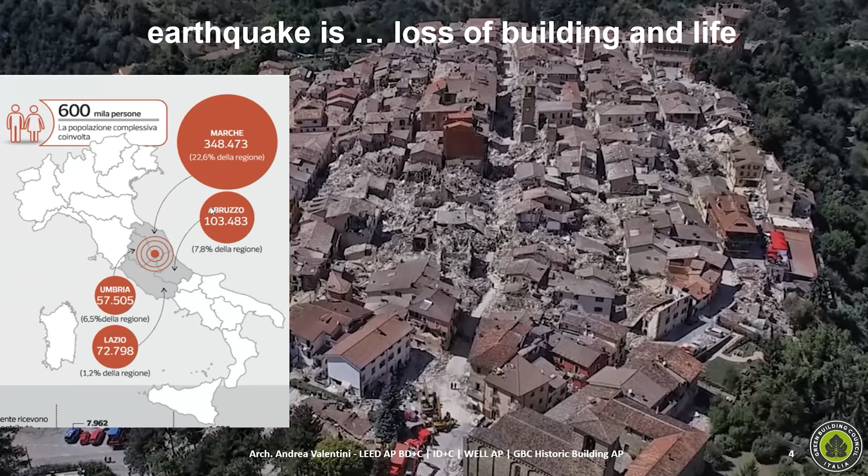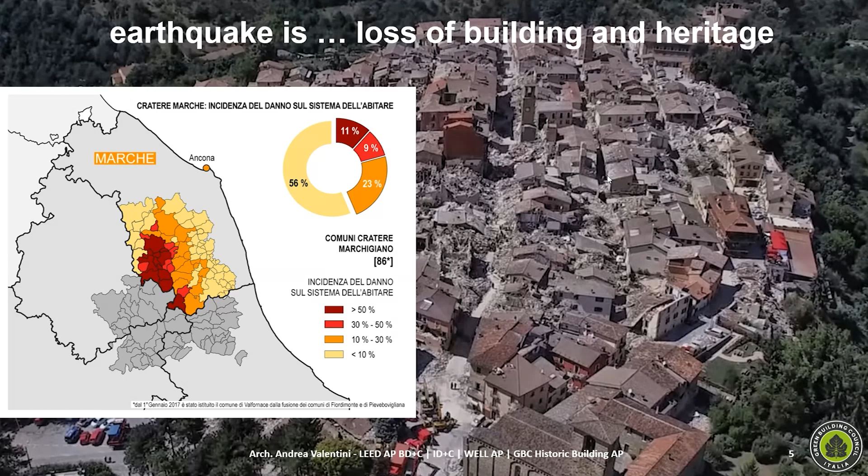We can see, especially in this part of Italy, there are a lot of historic buildings, historic centers, little historic districts, and so this kind of event causes a lot of damage to all the heritage. The last earthquake, in 2016, affected a lot of people, with some victims, especially in the ancient buildings. You can see a lot of small counties touched by this kind of event, especially the heritage and historic buildings.

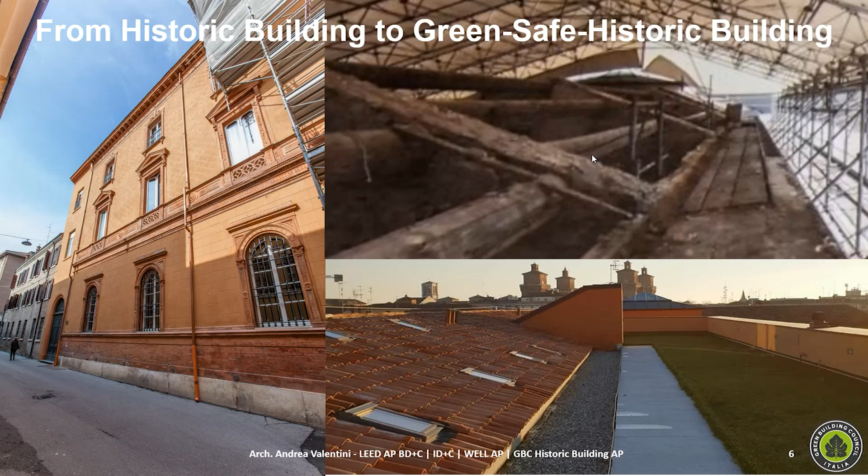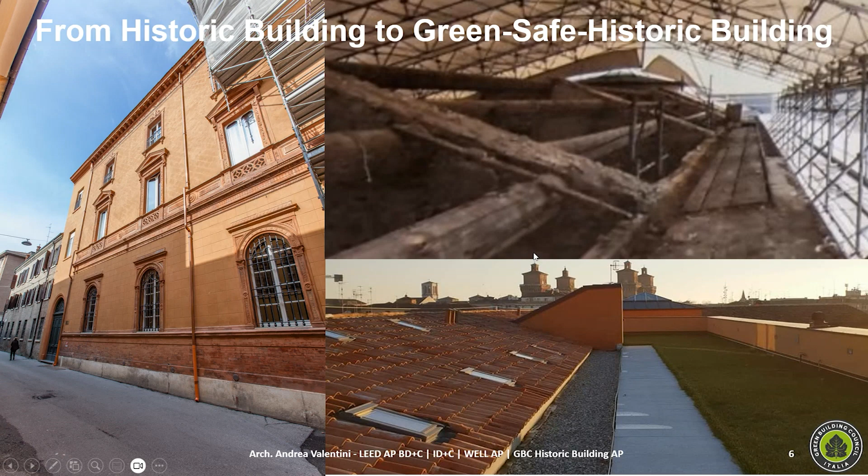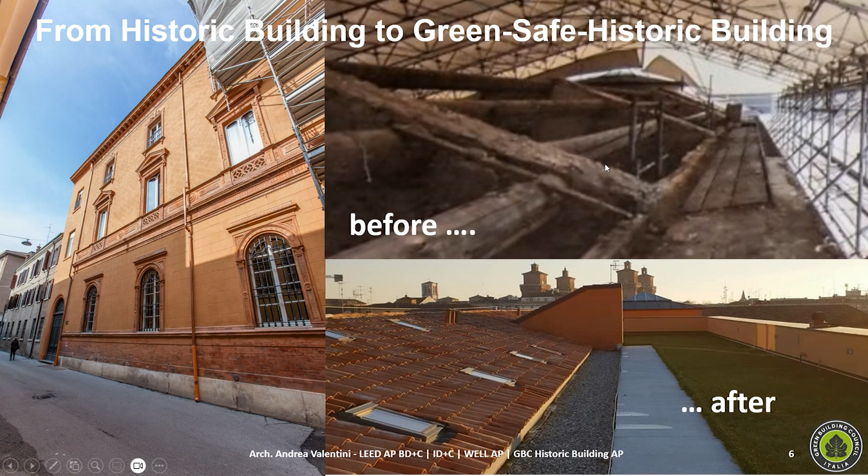This introduction is the attempt to merge historic building and safety, from historic building to green and safe historic building. Especially in historic buildings, we have to have also the safety of the building and the restoration. It must be focused not only on sustainability but also on safety. Safety is a category of sustainability. You can see this kind of image that really merges these issues, before and after this kind of intervention in an ancient building.

And so we now focus on the issue of heritage and sustainability. Restoration is a very important category. It's a category of sustainability. The restoration intervention is really a very old practice of sustainability, and we have to learn from this knowledge because we have to practice and know deeply this tradition. We have also published in English a lot of examples of historic building transformation and restoration, and you can find this publication.

We have done this rating system. This rating system is derived from LEED, but with the focus on restoration of ancient buildings. This is a tool for how to design and how to construct in a historic building, because it's a very particular construction technique. And so you now see the categories of LEED, categories of sustainability, as you know, like water, energy, material resources, indoor quality, innovation. But there is another category. This is the new category of the GBC Historic Building rating system.

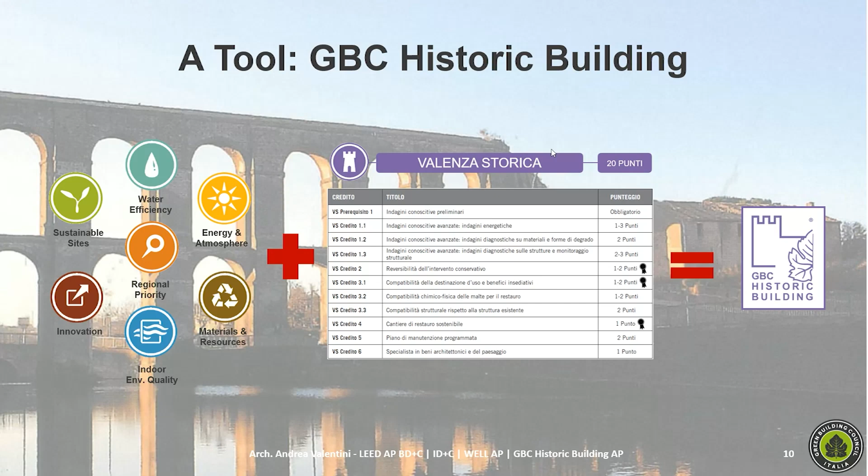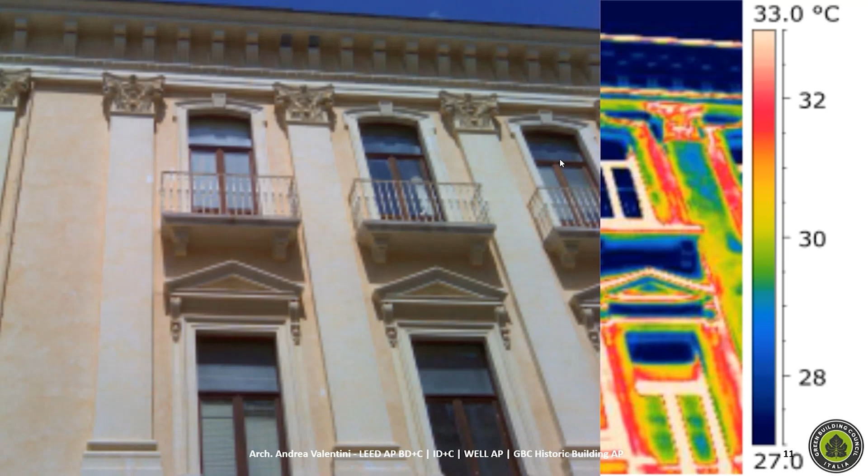It is historic value. In historic value, a lot of credits are focused on the techniques of analysis of the historic building, because you have to know very, very deeply all the history, the design, the materials of these ancient buildings. And so you can begin from an energy audit, so you can deeply know the building in its energetic issues. But especially you have to know all kinds of materials, because you have analyzed all the materials that over many years, in centuries, maybe have changed. And so you really have a thermography of the history through the mortars or the materials used in that building during the construction and the reconstruction over many years.

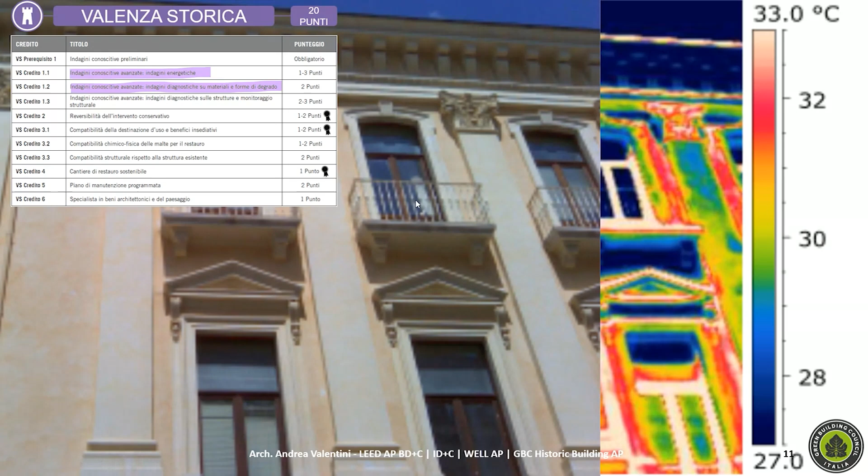And so you have also used this kind of energy audit to know the degradation of the building, not only the insulation and thermal properties, but also the kind of materials inside, like mortars, like bricks, and many other historic materials.

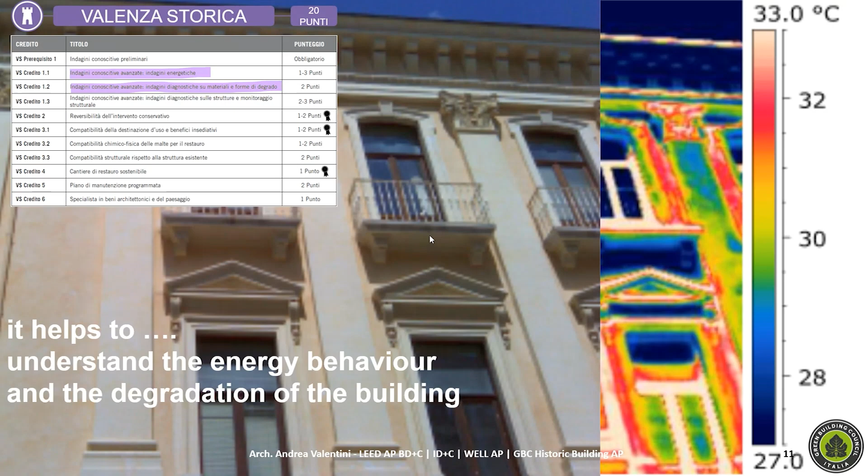Another important thing to know is the seismic resistance of the envelope and all the structure of the building. There are a lot of techniques to know the resistance of the walls, of the pillars, in all the materials, also in the wood structure. This kind of analytical knowledge of all the materials is very important, very fundamental to do the restoration design proper for this kind of buildings.

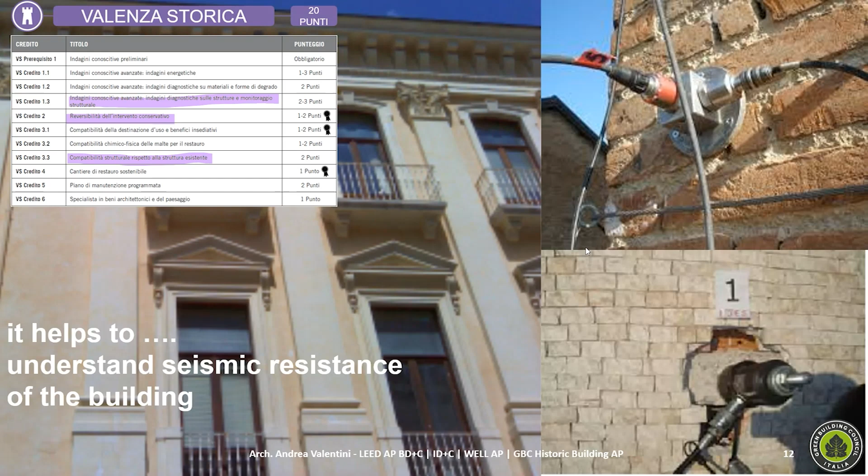You have to know the seismic resistance of the building, because you can do all the plans as you like, the energy efficiency, but at first you have to know the resistance, the seismic resistance of the building, because from here it derives all kinds of intervention to follow.

You have to know all the kinds of materials, the wood, and other kinds of pavements, and so you have to know the identity card of these kinds of buildings, the materials and the resistance of these materials. For example, this category of the rating system called historic value is very important. This is like a comparison between the historic building and the LEED building design construction.

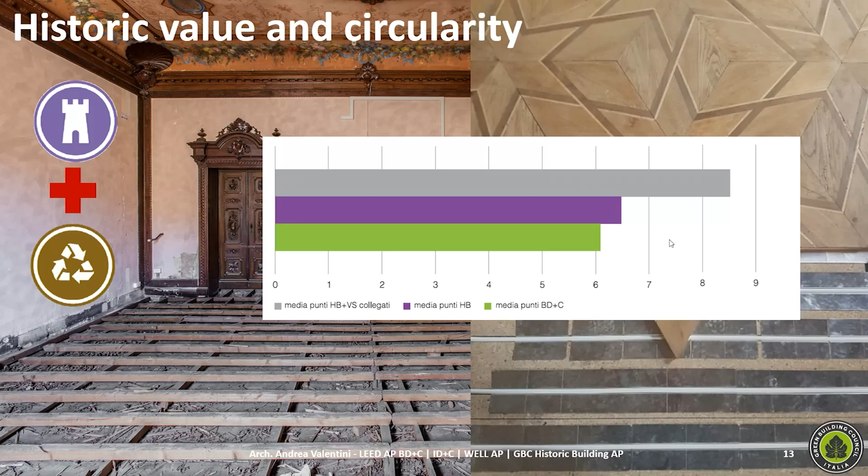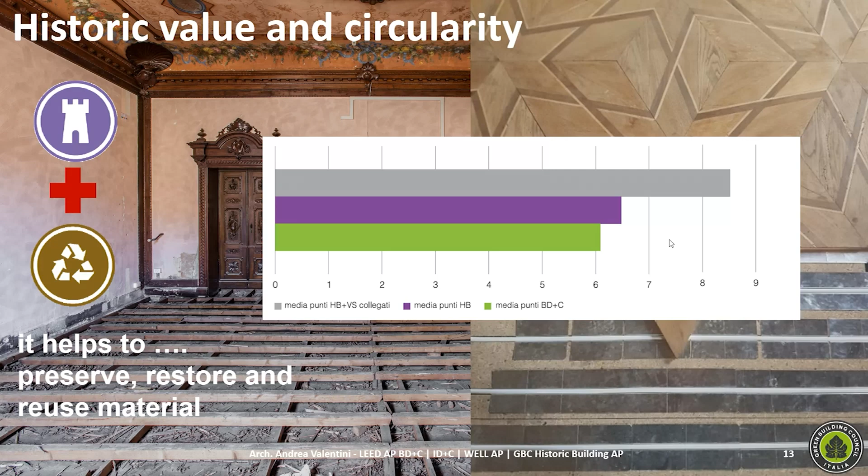It's very similar, but historic value is an important category of this kind of rating system. This knowledge helps to preserve, to restore, and especially reuse materials. If you don't know the properties of the materials, you cannot reuse them. If you don't know the kind of resistance, the kind of durability of these materials - because durability is another very important category of sustainability.

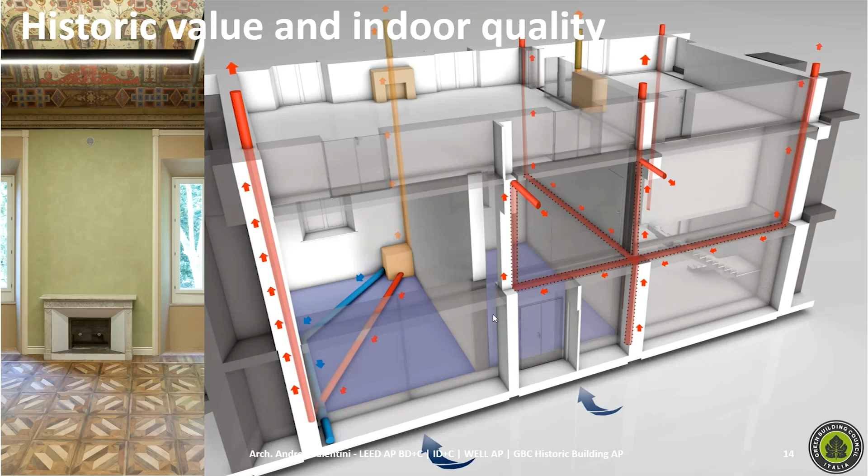We can also have knowledge of the ancient plants - all the kinds of distribution of ancient plants - because you can reuse the kind of cavity to pass new plants. Another important thing: this kind of knowledge helps to understand and use historic bioclimatic solutions.

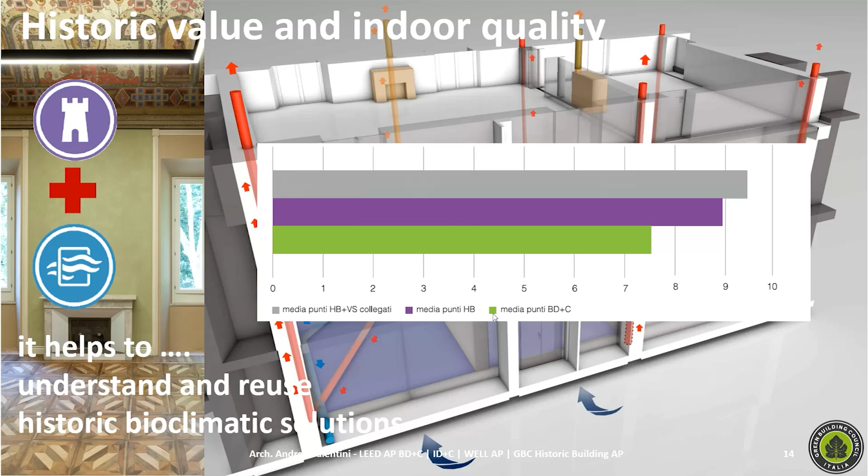This new category of historic value is very important. If you are interested, you can see in the English manual of this historic building all the kinds of knowledge and design categories that you have to apply in historic building intervention, design and construction.

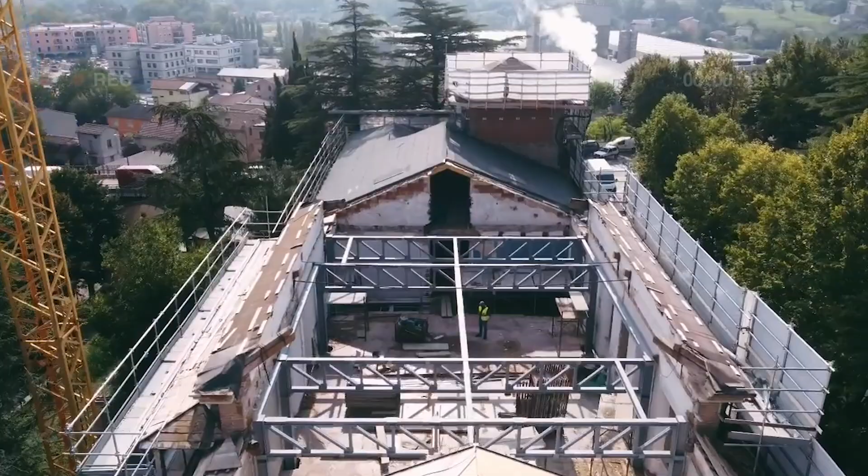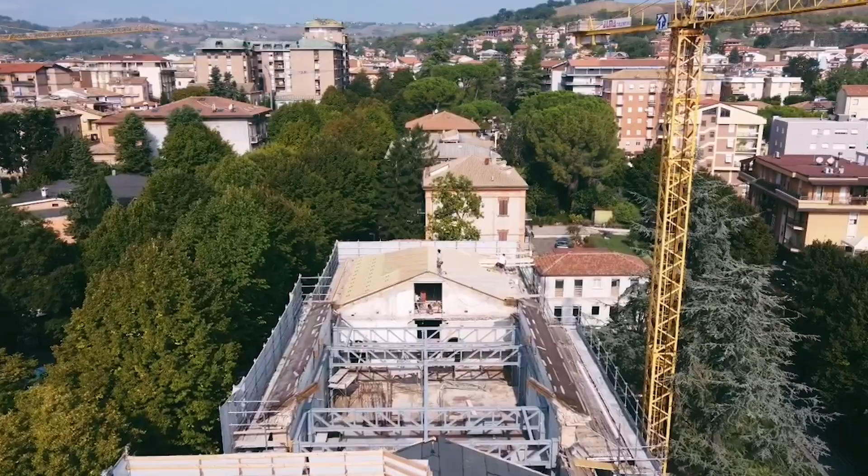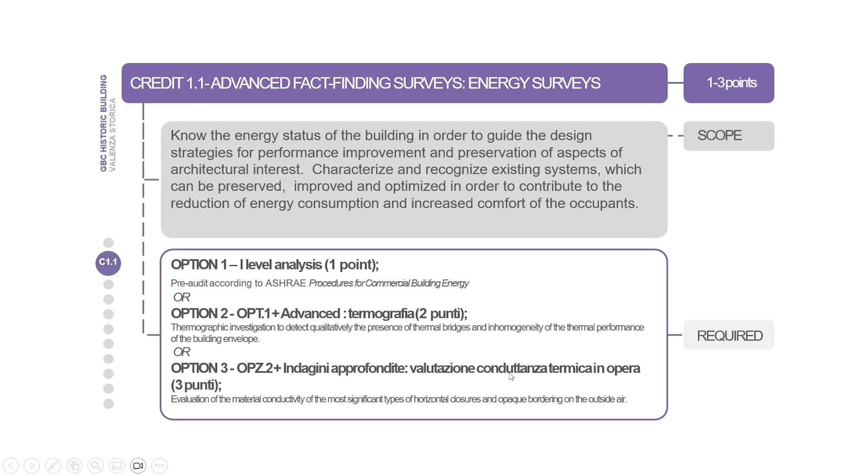As we have seen, we have to have energy surveys, analysis, and very important evaluation of material conductivity, the most significant types of horizontal closures and bordering on the outside air.

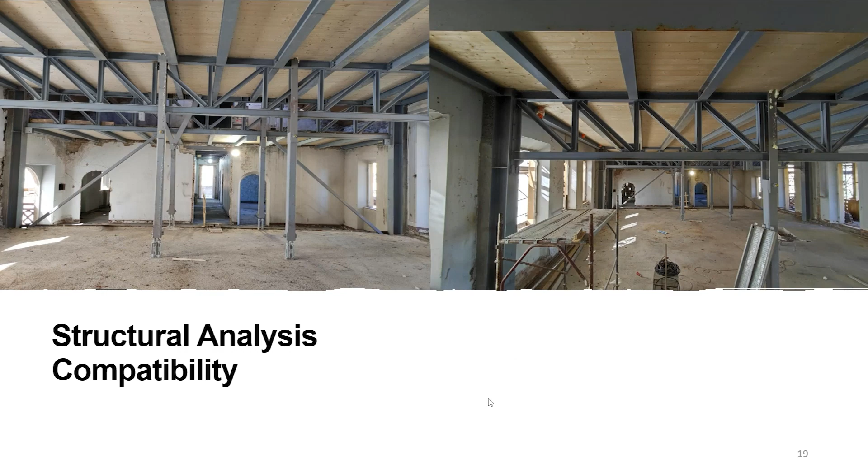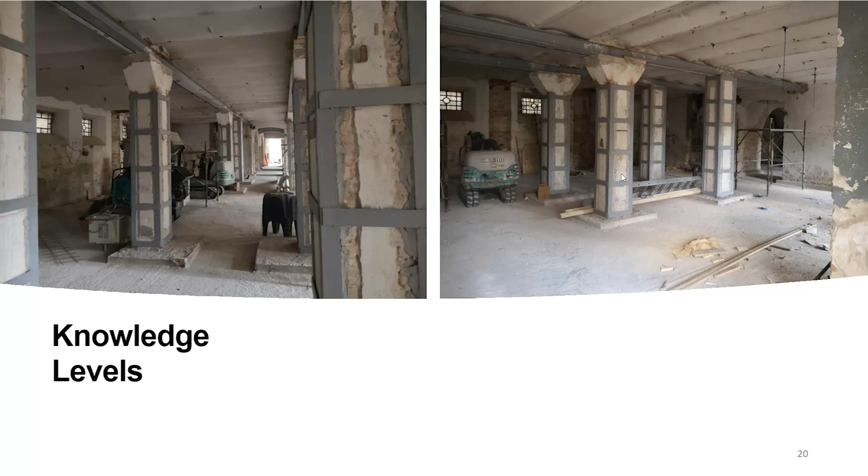Another very important thing: you have to analyze the structural compatibility with the existing building. In this example, you saw a ceiling hung with steel and iron structure, because you have to preserve the historic value of the image of this kind of building. This is an example with old pillars in bricks, very enclosed by steel structure.

You also have to value the reversibility criteria - whether your kind of intervention or restoration can reverse the intervention or restoration design. This is an example.

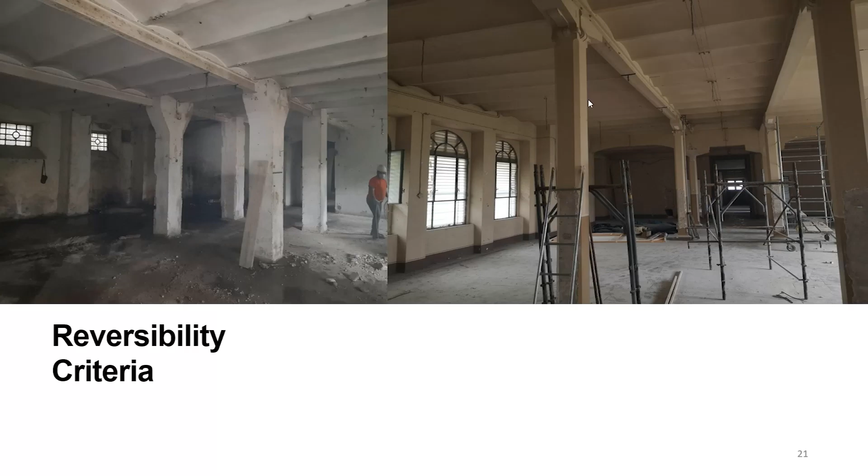This is the ceiling that we have seen before, with these very little pillars, but they are very historic - the memory of this building. There was a factory in the first years of the '90s, and so this kind of structure was maintained because of the image, and we chose to hang the ceiling, for example. The reversibility of the restoration design is very important.

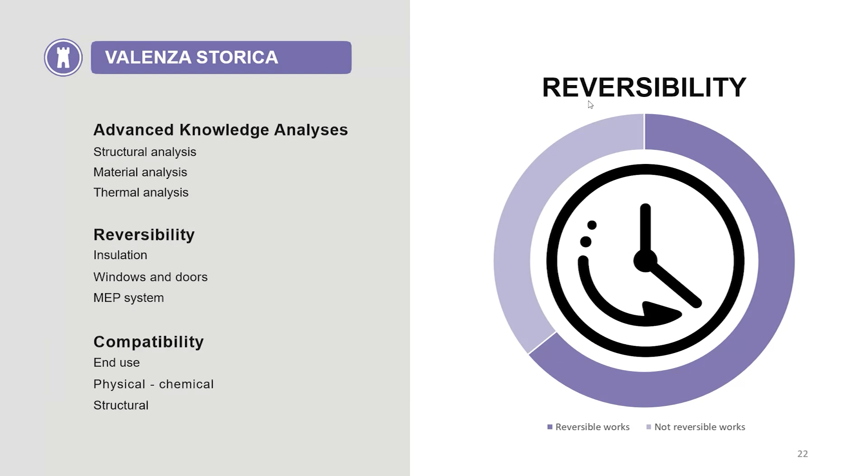So we have to have advanced knowledge analysis, the reversibility and the compatibility of the end use, the physical, chemical materials, and the structural materials. You also have to have the compatibility of the end use of this kind.

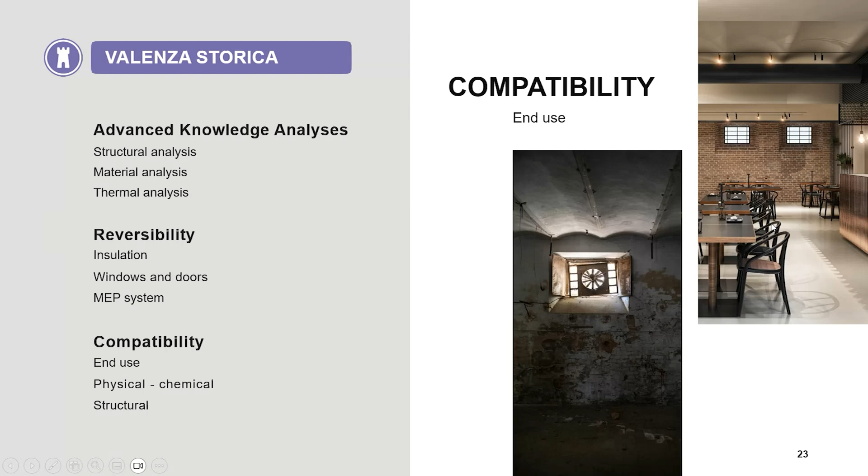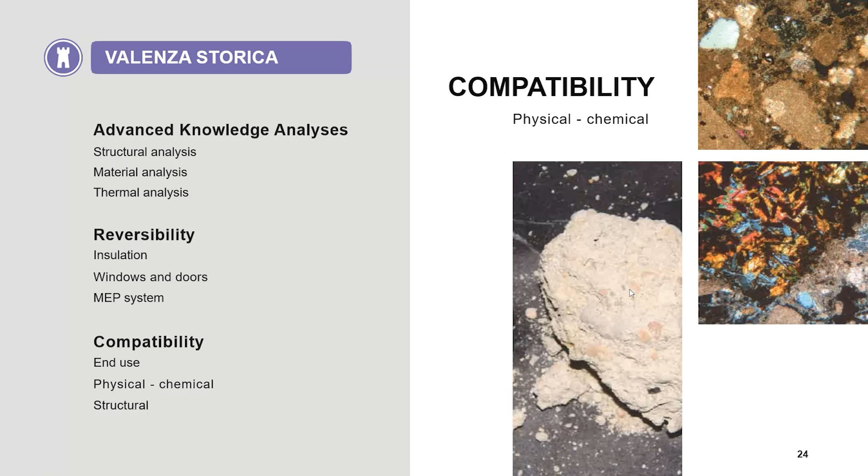In these two photos, before and after the intervention of restoration design. The chemical compatibility is very important for the mortars - you have to analyze the mortars with chemical analysis, and so you can also do the project, the design of a new intervention for seismic resistance.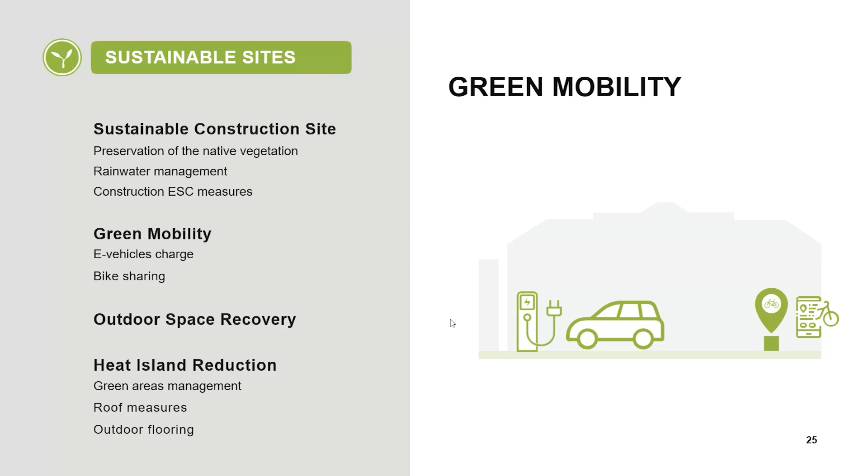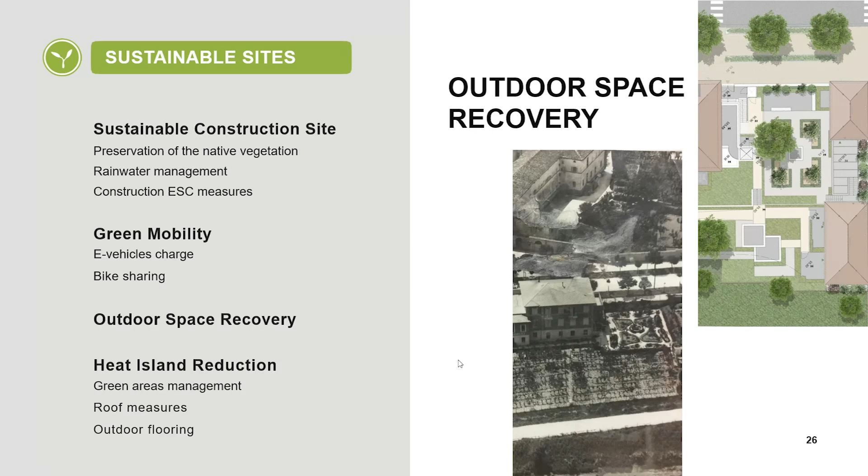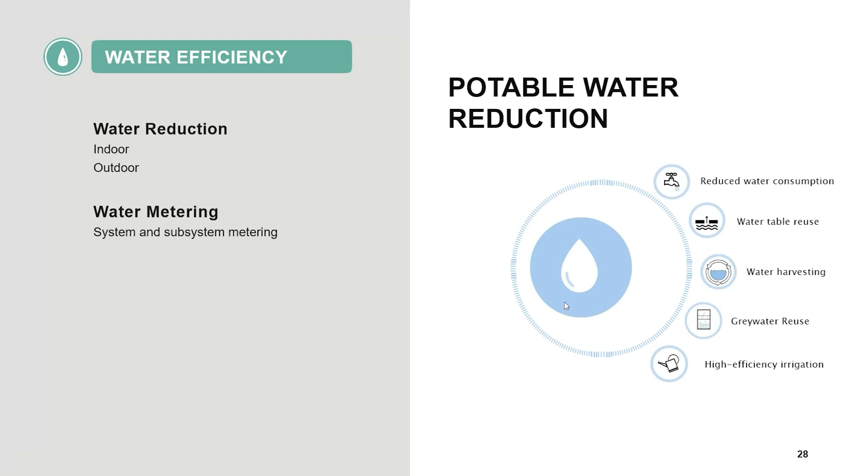And so you have the other issues of green mobility. It's very similar to other rating systems - the outdoor space and many other issues that you usually find in other rating systems, such as potable water reduction, water harvesting, reuse of gray water, and especially high efficiency irrigation. So it's very important.

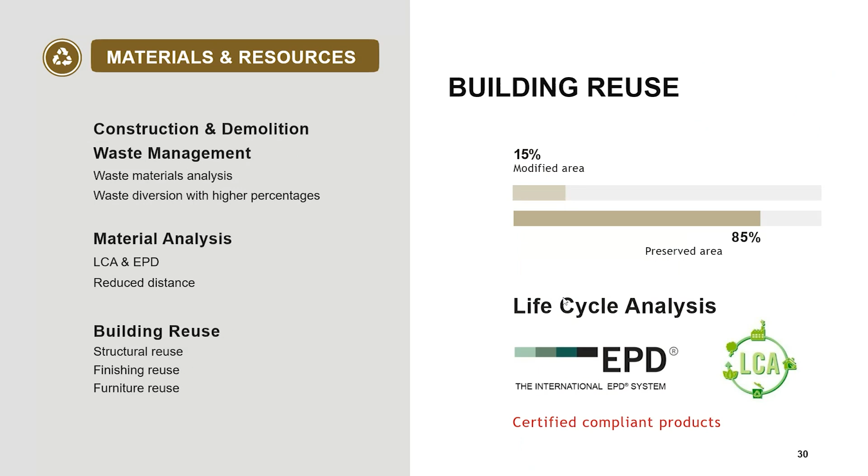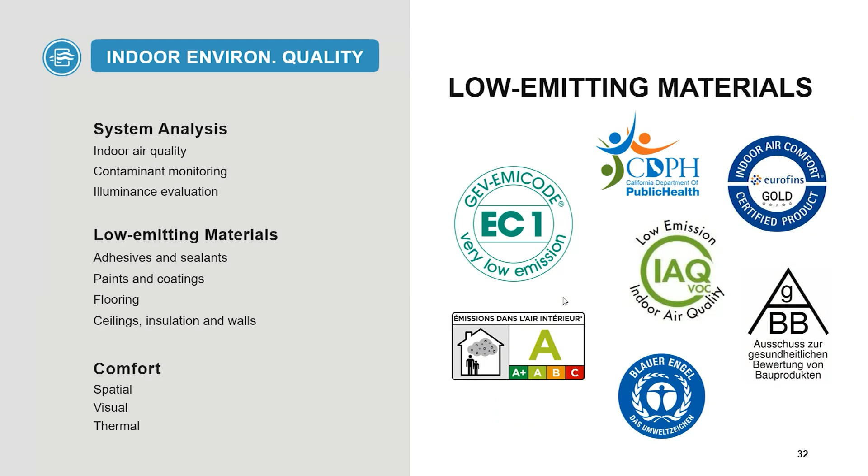Comfort is very important, and so you see all the low emitting materials. This is an example in Italy, a very ancient building from the early 1890s, and this kind of building is being certified.

At the same time with this GBC Historic Building and LEED v4 for hospitality. It's a very interesting example because we have tested all the differences between LEED and the properties of a GBC Historic Building. It's very interesting design and can be a history case. This kind of building was affected by the earthquake in 2016.

After the earthquake, the property decided to pursue both certifications: LEED for Hospitality and GBC Historic Building. This is the final result, with the platinum level. Very, very proud of all the team, all the designers, and also the sustainability team. It was 95 points for the platinum level for GBC Historic Building.

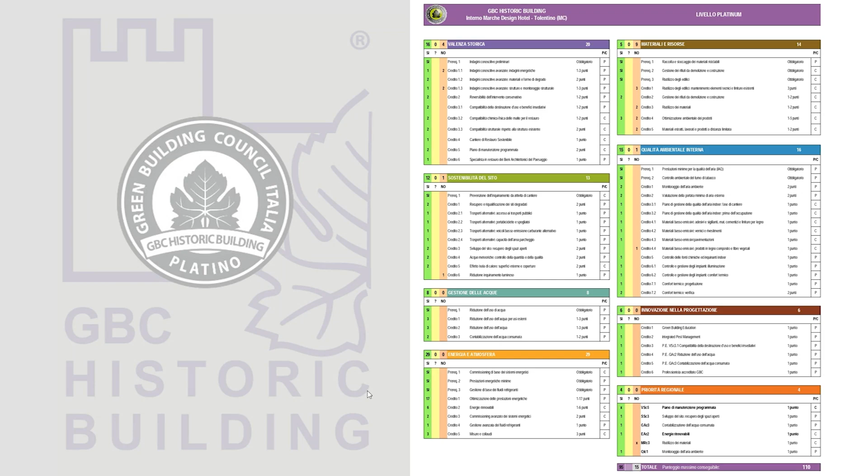As you see, this man was the owner of this building, and he was the president of Poltrona Frau, a very important Italian factory of chairs, with very important design models, as you know. This kind of building is a testimonial of the history of Poltrona Frau, an Italian factory especially for chairs, with a very international presence.

This was the name of Villa Gabrielli. It was built in the early 1890s. It was the factory and at the same time the house of the owner, because in those years the owner and the factory were together—a very historic heritage, to have a new life, a contemporary life, but at the same time to maintain the historic value of this building.

This is an example of a room, with all the rooms divided among all the pieces of design from every single designer who worked with the Poltrona Frau factory. This is the scale of this little hotel—about 30 rooms, not a big hotel. It's like a little building, not so big, but very, very particular.

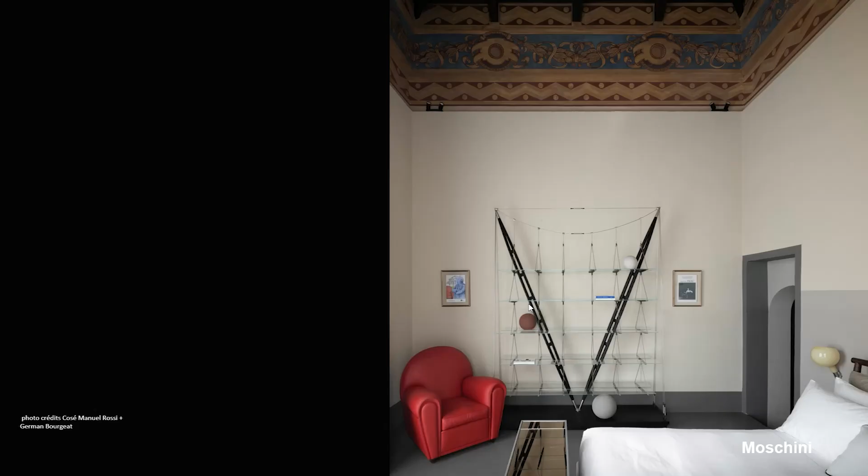You can see other rooms, every room different from another, and you see every detail of the furniture is selected from the catalog of Poltrona Frau. Really a very, very exciting experience. This kind of library is a piece of Poltrona Frau, like this kind of chair that is a testimonial of this factory.

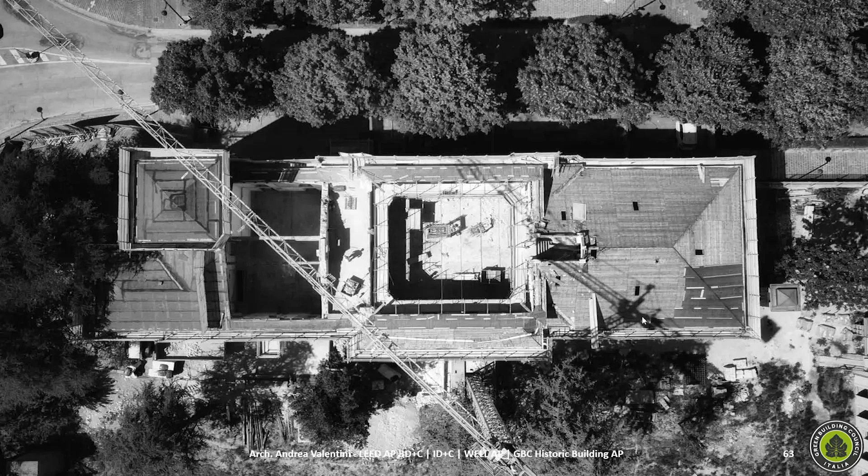And so I want to finish this introduction. Many themes that we can face in other sessions if you have interest to learn all the techniques of restoration. Thank you, and see you.